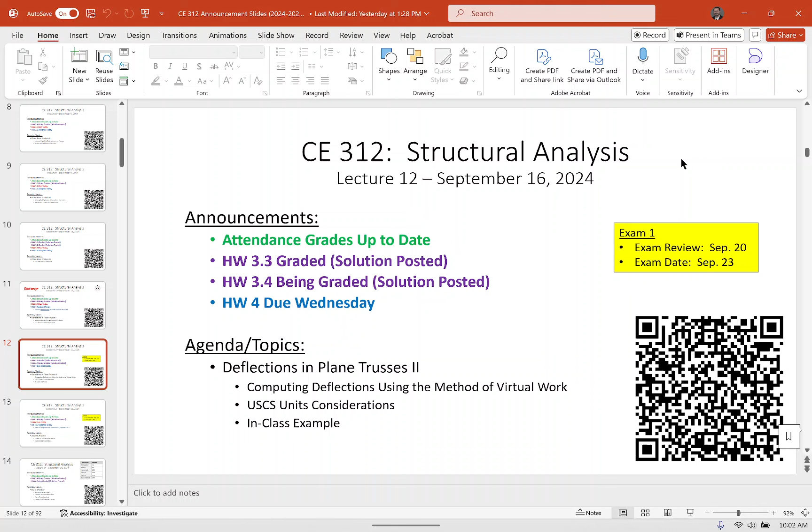So with that, let's get into our discussion today. If you recall, I think I maybe blew your minds a little bit last time with all this energy stuff. The idea is that we're going to be solving for deflections, and the way we'll approach deformation problems in structural mechanics is to use an energy approach. We compare the external work done to the system against the energy it stores, much like Link in Zelda drawing the bow.

Link does external work to the bow by moving the arrow through a given distance, so he applies the force through a given distance. That's the external work done. And then the bow stores energy, because when Link lets go, the arrow shoots, right? So if you compare those two energies and set them equal to one another, you can solve for the deflection. That's basically what we're doing.

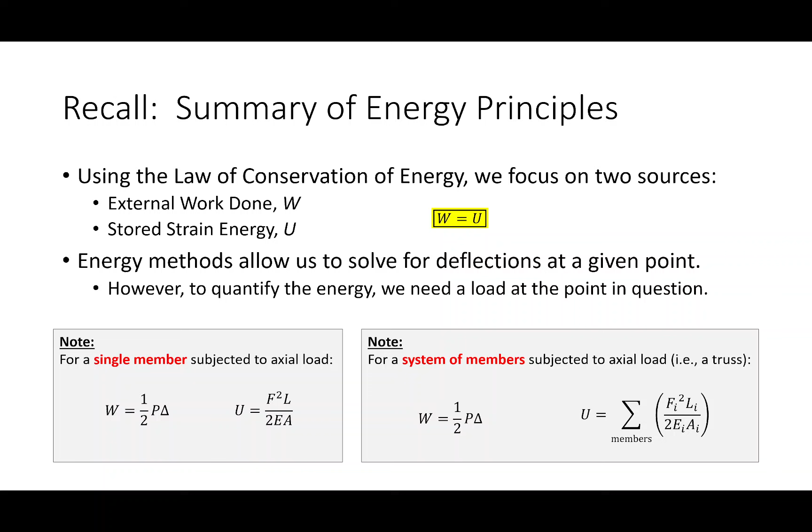Now the problem with a direct energy approach, which is what we had on the last slide and talked about last time, is that it's great if you have a system with a single load on it and you're interested in finding deflection where that load is. But that doesn't really happen a lot in structural engineering. In structural engineering, we have loads all over the place, and we want to find the deflection right there.

So the way we handle that is we preload the structure. We put a fake load where we're interested in finding the deflection, and then we add on top of that all of the other loads. And if you remember, we called that P1 and P2. So P1 is that fake load, P2 is the set of all the real loads.

So when we do that, we separate all our energy components and say, okay, let's only use the ones that really matter. Because if all the external work done equals all the stored strain energy, then each of these components are equal, like W1 equals U1, W2 equals U2, and so on and so forth. So we'll only use W2 and U2 because those are the ones that are most useful.

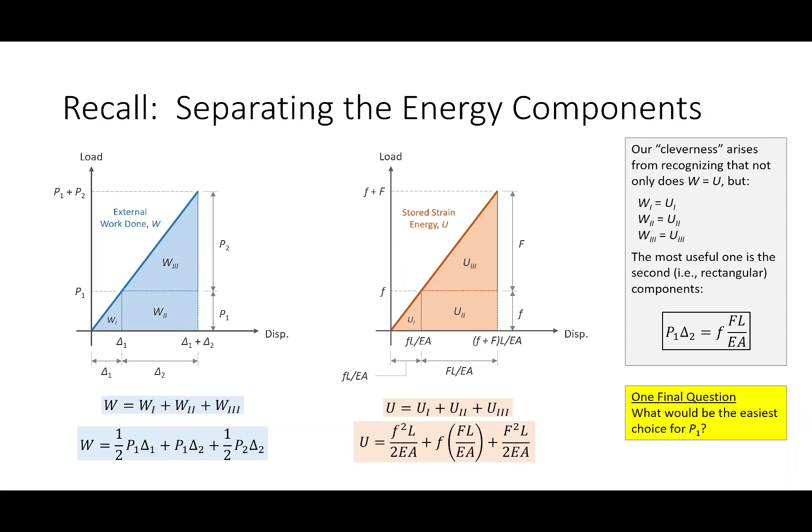So what we get is our fake load times the deflection we're actually interested in equals this. And since this fake load can be whatever we want it to be, because we're using it just as a means of tracking the energy, we'll set it equal to 1. And that's the method of virtual work. So a lot of what you're about to see in the next few slides is just a rehash of what we discussed on Friday.

We're going to put it to practice with a real example here in a bit. So, what do we do with the method of virtual work, or what is the method of virtual work? It's also known as the unit load method. It's an energy-based method for computing deflections.

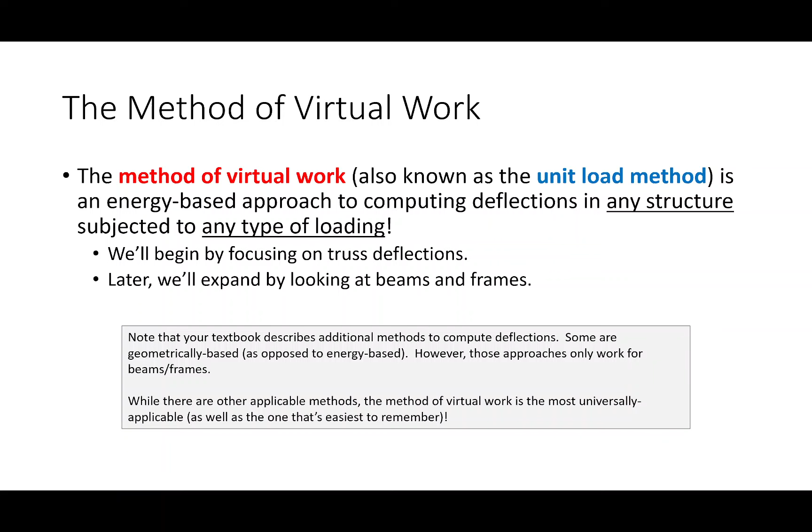We're going to start with truss deflections, but when we start looking at beam deflections and frame deflections, we're going to use the same approach, the same idea, the same unit load method. The mechanics of applying the unit load method to beams and frames is a little different because we've got to break out some integrals, but the idea is the same. The underlying concepts have not changed.

So how does it work? We start off with the illustrative example we talked about on Friday. We said, all right, let's determine the vertical deflection at B. Here's the truss. It's a regular old structural analysis problem like we've seen this whole semester. The only thing that's different is I'm giving you more data than I did before.

I'm giving you the area of each member, in other words, how big around they are, and I'm telling you that each member is made of aluminum. And that's important because I'm giving you the E value for aluminum. So what I have done for this truss is I have defined not only its geometric section properties, but I've defined its constitutive properties as well.

I didn't do that before because for statically determinate structures, it does not matter if the truss is made out of steel or concrete or popsicle sticks. It doesn't really matter. As long as the truss is determinate, the forces in the members and the reactions are independent of what the truss is made out of.

But that's not the case with deflections. Think about it like this: if I made a truss out of steel elements as opposed to making a truss out of rubber bands, it's going to deform differently, right? The deformation is going to be different. That's what we're talking about - deformation. So we have to be more precise in our definitions.

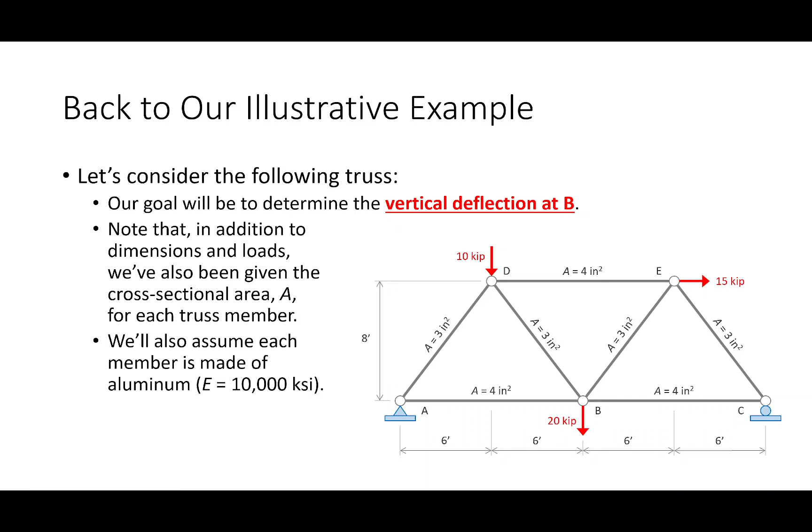So how does it work? The first step is we solve the truss. Now, we've already done this problem a while back, so these numbers that you see here should be familiar - this was a truss that we solved in a prior lecture. I'm going to call these the real forces because these are the actual forces present on the structure, and I'm going to denote real forces with a capital F.

Then what I'm going to do is kick all of those loads off the system, and instead only apply a single load. That single load has a magnitude of 1, because remember, we can choose the magnitude whatever we want, and 1's the easiest number to deal with, because anything times 1 is itself. I'm going to place that load on joint B, because that's the problem - I'm interested in finding the deflection at joint B. I'm placing it vertically because I'm interested in finding vertical deflection at joint B.

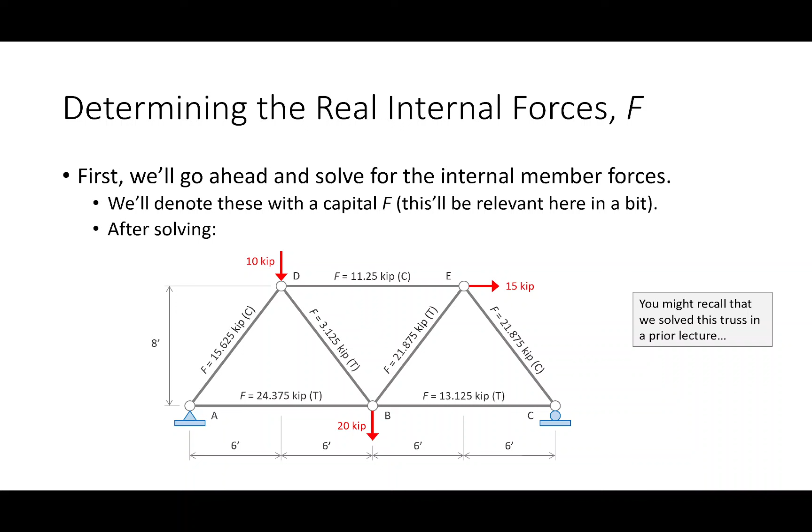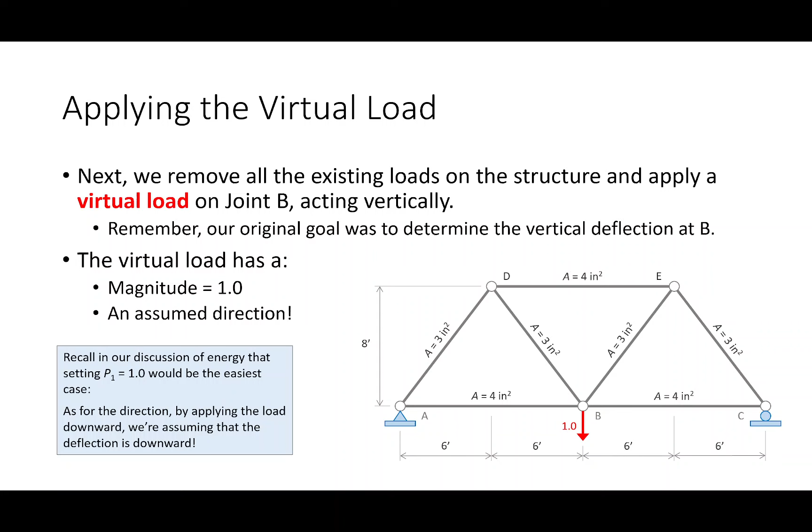Now I'm placing it downward, because if I go back to the original problem and look at the loads on this truss, I kind of think that when it's all said and done, joint B is going to deflect downward. So I'm going to take that fake load, which I'll call a virtual load, and apply it downwards. If I get a negative answer at the end of the day, that just means I'm wrong, and that it's deflecting upwards. Everybody all right with that? Same kind of idea as what we've done before, right? So far so good?

So I solved the truss. Solve the truss again - that's the only part that does kind of suck with deflection problems, is that they are labor intensive. So I'm sure somebody's asking, well, what about an exam? Don't worry, the trusses in this regard will be manageable - trust me, I know what I'm doing there. So we apply the load, solve the truss again, and we get a new set of internal forces in the members, and I'm going to call those little f's.

The little f corresponding to the virtual forces. Now, a couple things about the virtual analysis.

Does anybody notice how the structure is symmetric now? It wasn't symmetric before, but it is now. So this member equals this one, equals that one, this one equals that one. So if you can exploit symmetry, you can make your work a lot easier.

By only solving half the structure. Also, while it isn't true in this problem, it is going to be in our example: if you're removing a bunch of loads and replacing them with just a single load, you might have zero force members. Maybe you didn't in the real structure, but you do in the virtual one. So if you can identify some zero force members, you can make the analysis go real quick, and we're going to see that today with our example. Just something to keep in mind.

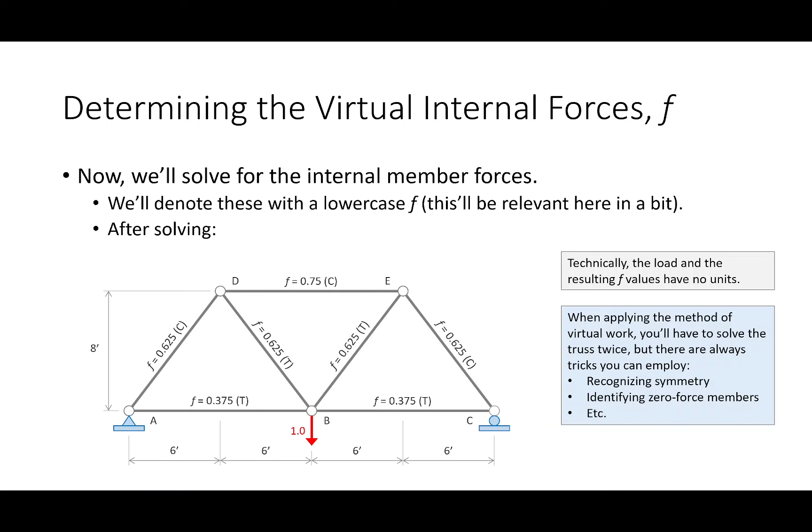So for every member in the truss, you've got a set of real analysis results, which we'll call capital F, and a set of virtual analysis results, which we'll call little f. If we're talking about US units, big F is usually measured in kips, and little f is unitless. When we put that 1 kip load, it's not 1 kip or 1 kilonewton, it's just 1, so it doesn't really have units. Your textbook calls this F and F sub V, but it's the same thing, F for virtual.

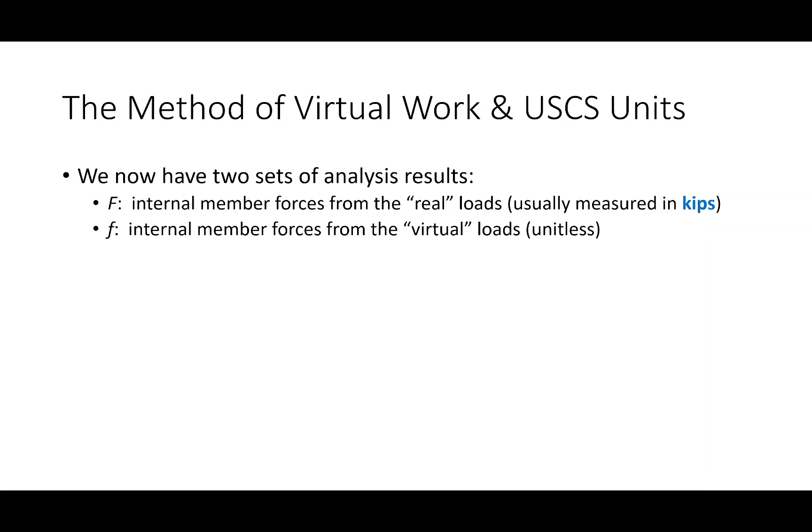So the next thing we have to do is compute little f times big F times L over EA for every member. Set it up in a table: little f, big F, L over EA, row by row for every member.

So by the way, what software package would be very nice for this? Excel. It's a very tabular friendly computation.

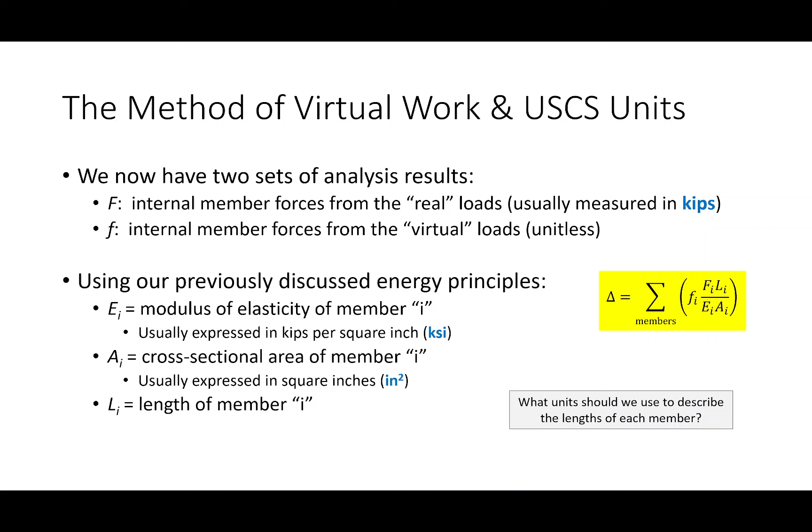Now, the terms that go into this are your E value, which is in KSI, and your area, which is in square inches. So notice, I've got kips, no units, kips per square inch, square inches, and then the length of each member. What units should I use to describe the member length? Inches. If you look at the problem, the truss members are described in feet, but this isn't feet, these are inches. The reason we're using inches is so that the units cancel out. So you could argue there's a conversion factor of 12 we have to apply — we're going to take all of our lengths and multiply them by 12, and we'll do that today as well. I just want you to see that the lengths are in inches, and that's why. Does that make sense?

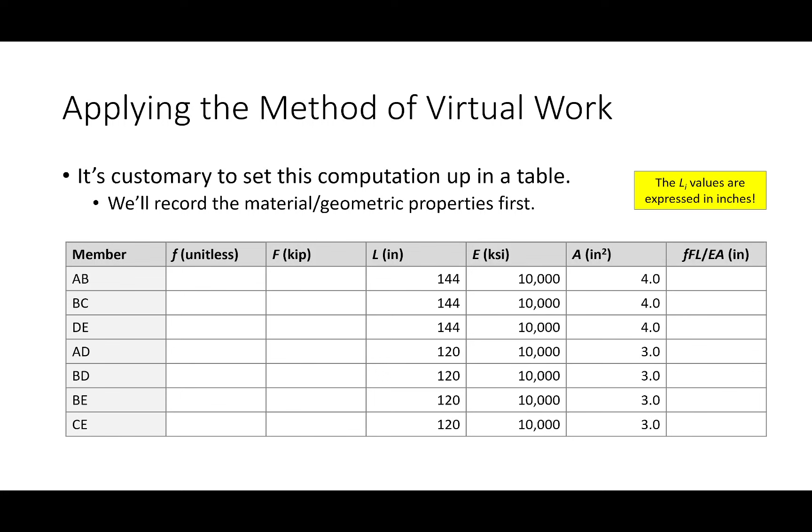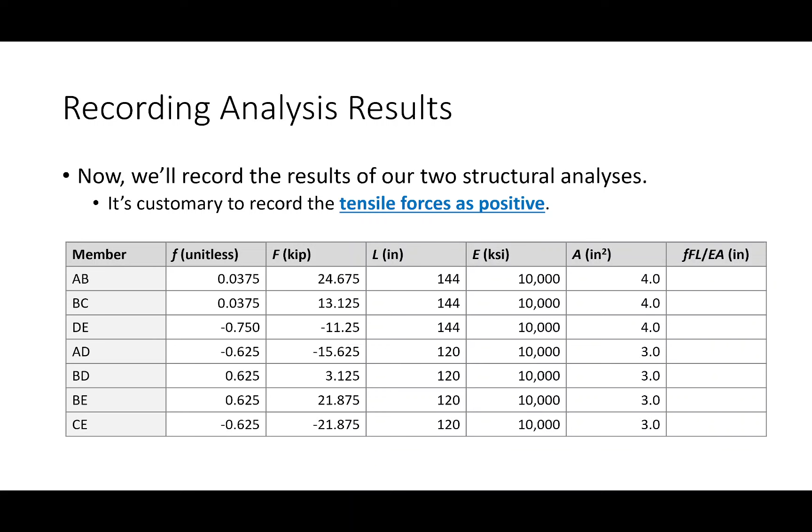So set it up in a table. Here's my L values, here's my E values, here's my A values, corresponding to each truss member. Just be a little bit organized with it. We're going to put the little f values here, big F values here. Typically just put tension as positive as long as you're consistent — you can actually use compression as positive, but customarily we always use tension. So if there's a negative value, that just means that answer's in compression. And then for each row: bam, bam, bam, divided by that, equals this. That times that times that, divided by that, equals this. And so on and so forth.

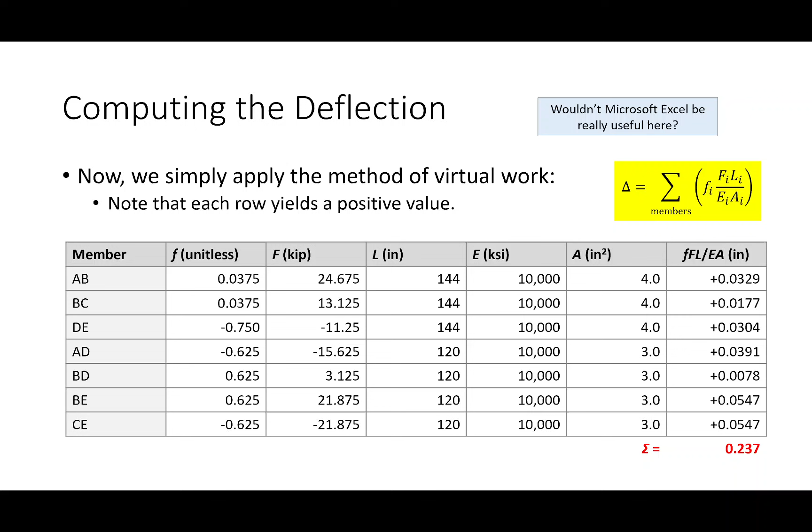And you get some values, sum them up, and that sum is your deflection, point blank. So to summarize, because we got a positive answer, and because we took care of our units, I propose that joint B deflects 0.237 inches, and it deflects downward. And that's how you do it.

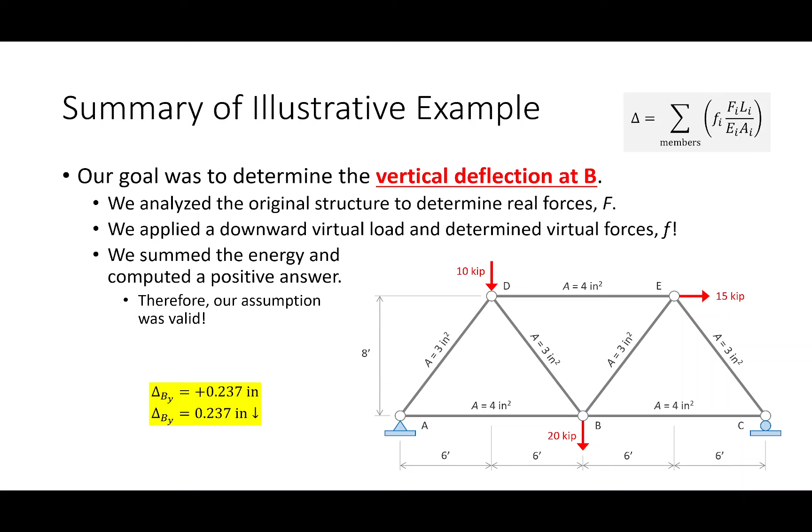So I want to take a step back and just make sure, from a concept standpoint, that the idea makes sense. Is everybody okay with the general idea of what we're doing here? Everybody good? So if that's the case, let's look at our in-class example.

Everybody okay with that? All right. So, here's what we're going to do.

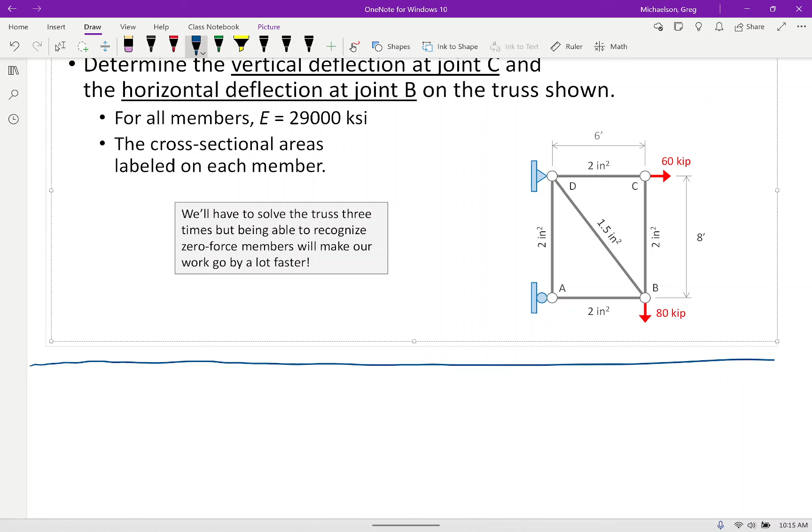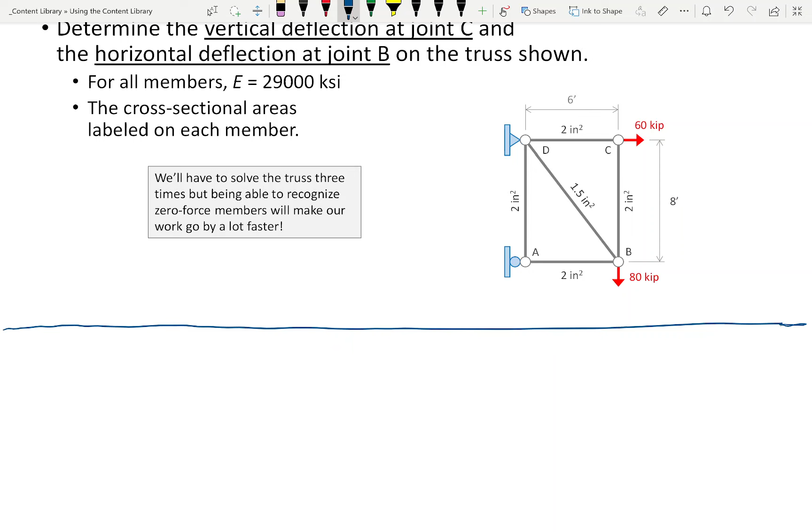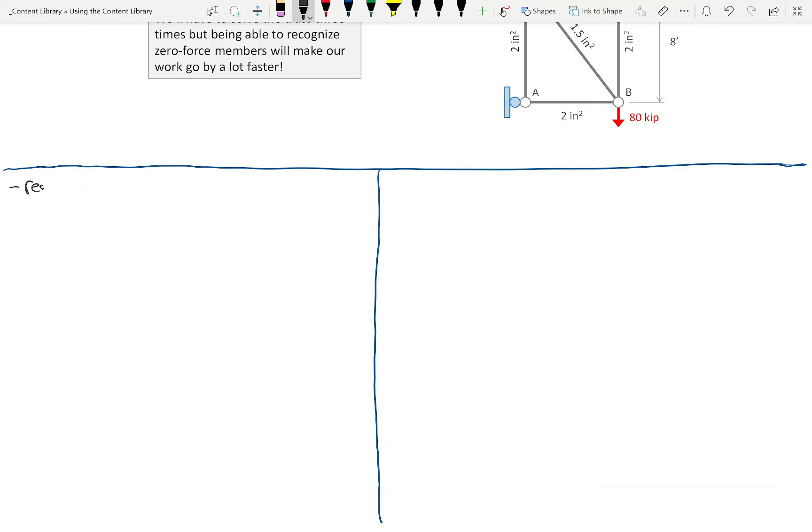All right, so I want to try and keep this organized. So if you don't mind, what I'm going to do is put the real structure over here, and then I'm going to put a virtual analysis over here.

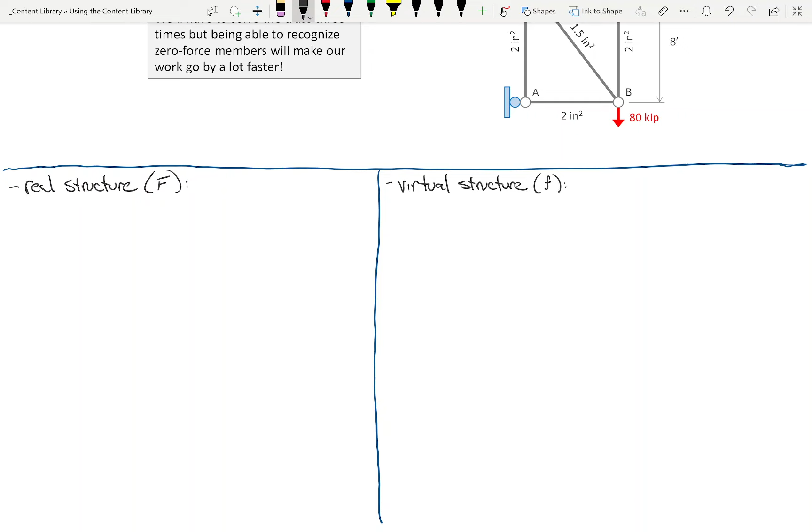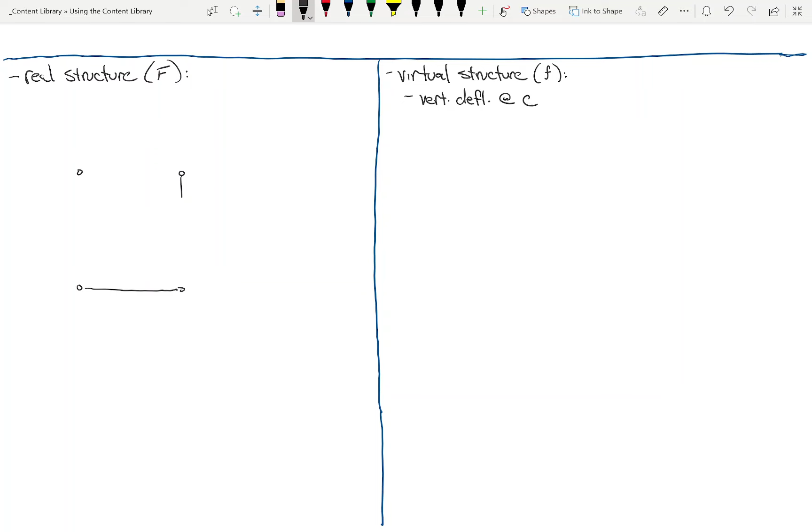And what we'll do is we'll do the vertical deflection first. So we'll do that. I'll try and not write too tiny, but you'll see what I'm doing here. All right, let's see.

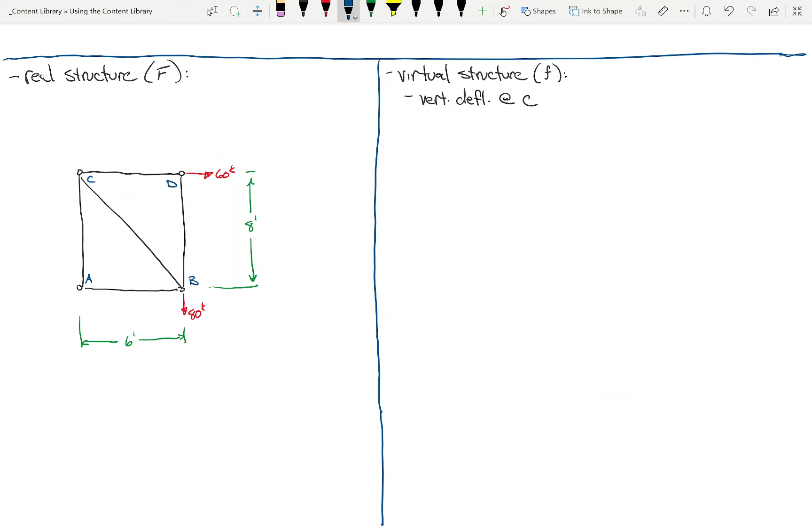This is... okay, all right. Let's see, in terms of boundary conditions, we have a roller here, and we have a hinge right here.

I think you got C and D swapped. I did? Yes. You are 100% right. You are 100% right, okay.

Let's see, is there any zero force members in this truss? Anybody see one? I see one, I actually see two.

AD, you are right. But why'd you say that? Because if you look at joint A, there's only a reaction going left to right. There you go. If there's a force here going horizontally, that's got to be the same. What's going on there? Nothing. So this is a zero force member. By that logic, anybody see any other zero force members?

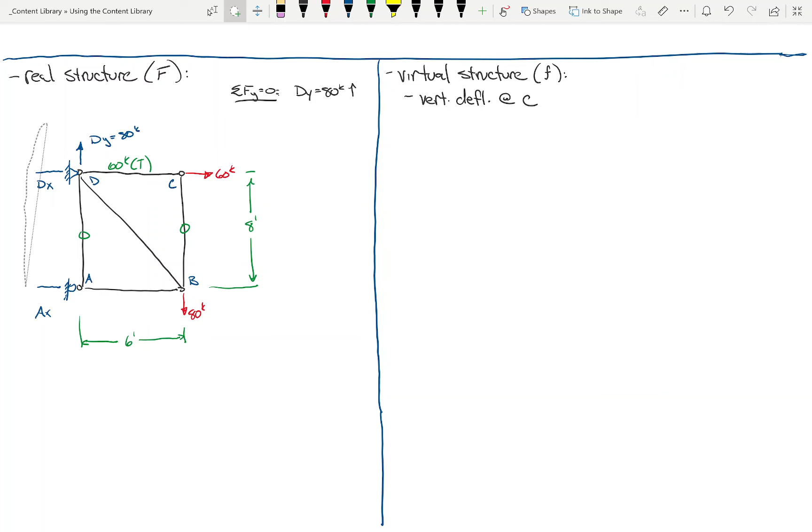Maybe I can do this, maybe I can scooch this over just a bit. I forgot you, you go back there. All right, and I'm going to sum moments at D.

And what am I going to get? Let's see, I don't have to worry about that, don't have to worry about that. I'm going to get 80 kips times 6 feet. Has got to be balanced by AX, right? So if 80 kips is rotating it like this, AX needs to rotate it the other way. So I propose that AX is going in that direction.

So if 80 times 6 equals something times 8, what is that something? 60, right? So therefore...

So if AX equals 60, what's DX? Is it 0? Oh no, it's 120 to the left, because I've got 60 and 60, so that's got to be 120. Did everybody see that?

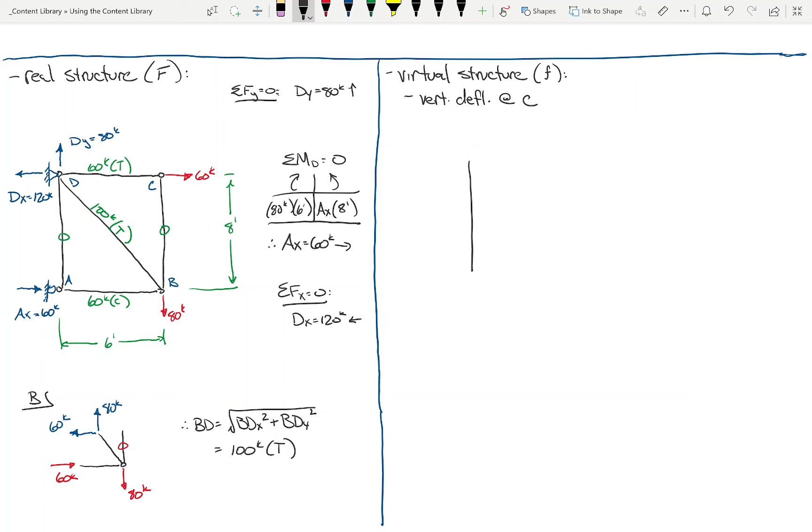All right, now let's do this truss analysis again. So what are we going to do? So we're going to analyze this truss all over again.

But what I'm going to do is, instead of analyzing the truss for the loads that were originally present, I'm going to kick all of those loads off and I'm going to place a single load on the truss. That load is going to have a magnitude of 1. It is going to be vertical and I'm going to place it at C.

Why is it a vertical load at C? Because I'm interested in the vertical deflection at C. So I'm going to have just a single load of 1.0. Now, my question is, would you like me to place that load upwards or downwards? Downwards. Okay.

So now we are going to analyze this truss all over again. And then likewise, we're going to have a reaction here and a reaction here. I'm going to assume those in the same direction that I have over here. So we'll call this AX and DX.

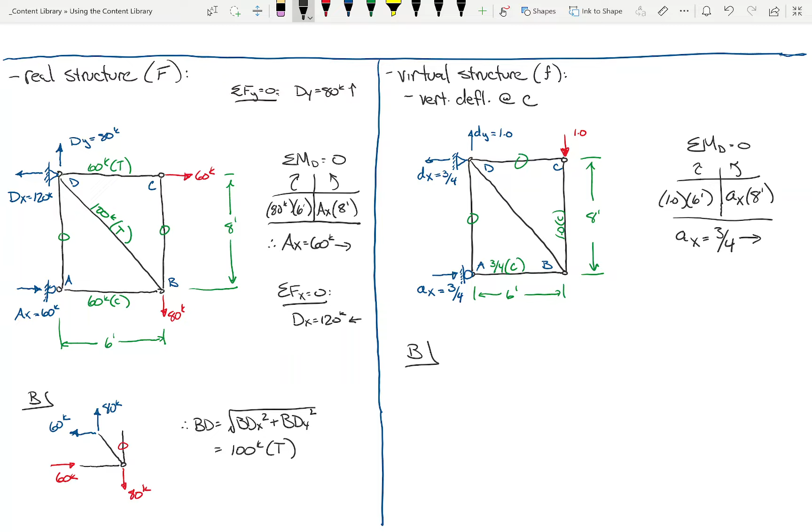So, are there any external loads on joint B? No. There were over here, now there's not. We have a 1 going like that, and a 3/4 going like that. So what do we have? A vertical and a horizontal.

So the vertical is 1, that's 3/4. So they're both in the right direction - they both comport with the slope ratio. So what is BD going to be now? Five fourths, right? And that's in tension, right?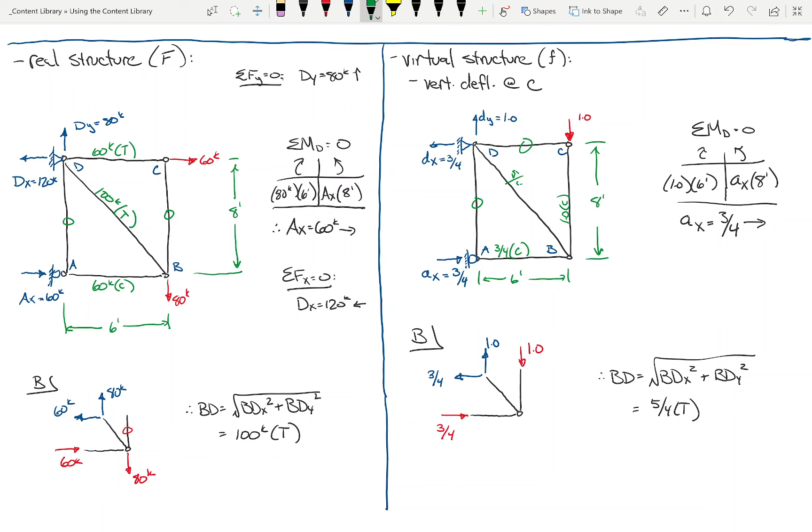I knew I threw a bunch of stuff at you and we did this really fast, but hopefully the truss analysis, while it was a little fast, was manageable. Does anybody have any questions about what we did? Everybody good so far? Okay.

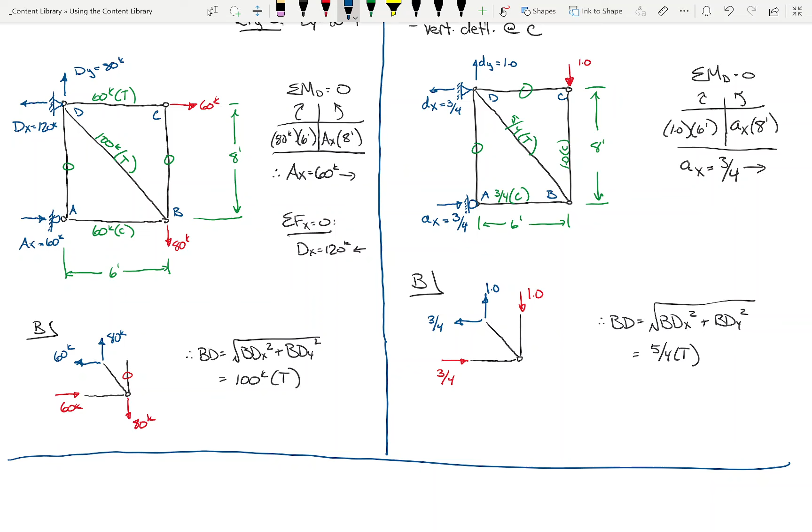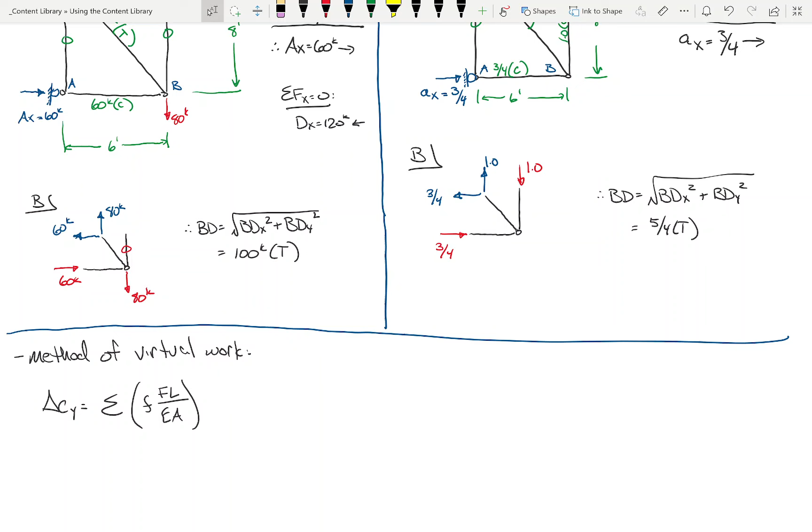Does everybody have this here on the board? Okay, so now what we can do is we can apply the method of virtual work. And what does the method of virtual work say we've got to do? That if we want to determine the vertical deflection at C, we sum up the following: little f times big F times L over EA for every member, okay? Now, as I said, this is a calculation that loves to use what software package? So let's do that.

It's almost like I was ready for this. By the way, what unit should I put length in? Inches.

So this is going to be my table that I set up. The 5 members that I have in the truss are - I've got the horizontal members, I've got the vertical members, and I have my diagonal. Okay? All right.

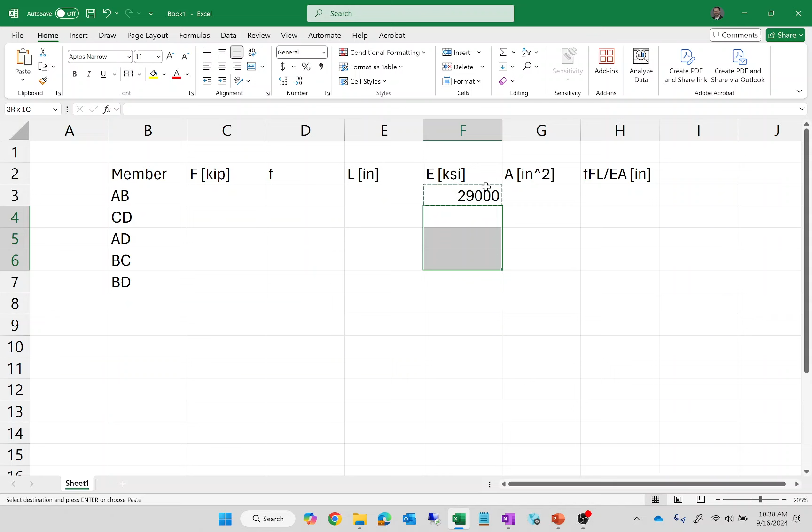Let's do the easy values. What was the E value for every member? 29,000. Okay, what about the areas? They were all 2 except for the diagonal, right? The diagonal was 1.5.

All right, what about the member length? What are the lengths of the horizontal members? So 72 inches. What about the verticals? 96 inches. And what about the diagonals? So if you want, you could do it like this: 12 times square root - just do the Pythagorean theorem, multiply it by 12, get 120. Okay, so far so good?

Okay, so let's start off with the real forces. Somebody help me with that. What was member AB? 60 kips, in compression. So, negative 60, okay. CD: 60 kips - positive 60. What about AD? 0. What about BC? 0. What about BD? 100 kips in tension, so positive.

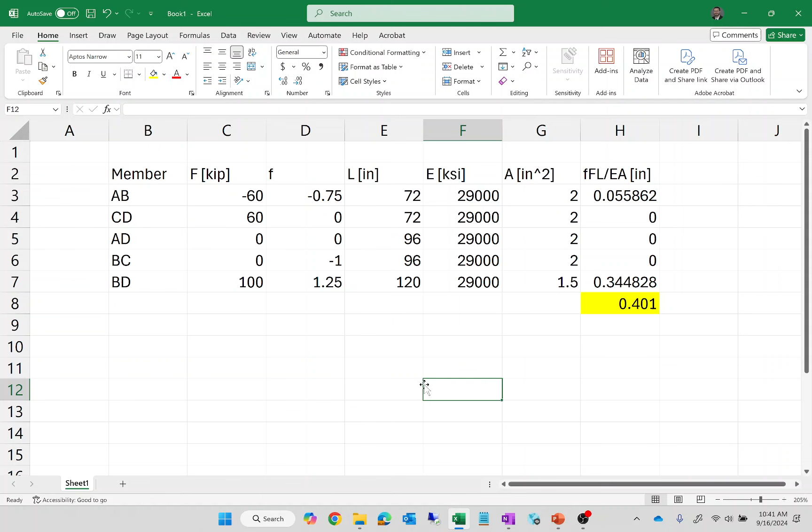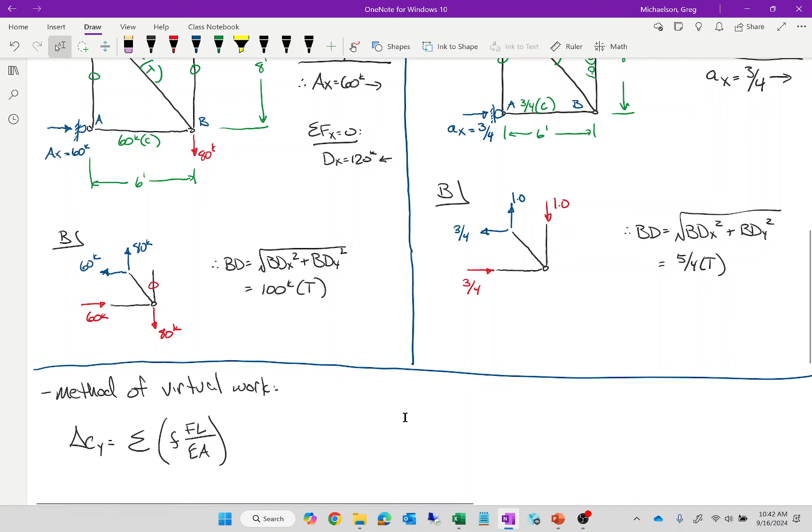Pretty simple, right? So what do we do? For each row: little f times big F times L, divided by E, divided by A. So you can do that, or you can put it in parentheses and get the same answer. Then just copy that down. A lot of them are 0 because either the real or the virtual force is 0. And then sum it up. What I like to do is not go more than 3 decimal places. So what we'll do is put that in there just so we have it for posterity.

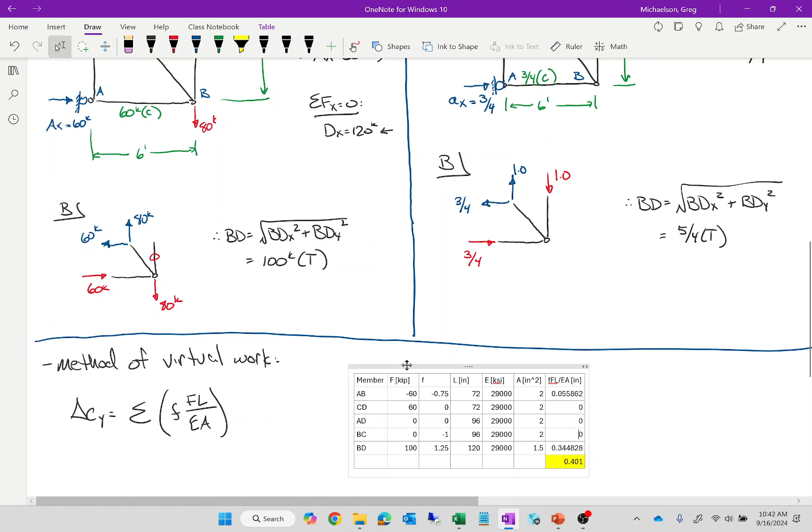That right there, and we get... what are the units, by the way? Inches. And which way? Down. Because we assumed downward displacement, and that's what we actually got.

And we're going to do the horizontal one here in a second. It's a lot easier than you would think. All right, any questions?

Okay, first off, this is for the vertical deflection. What's going to change for the horizontal deflection in this table of values? The little f, right? So in Excel, let's just delete those, and when we solve the virtual truss again, we'll just put those values in right here. Does that sound good?

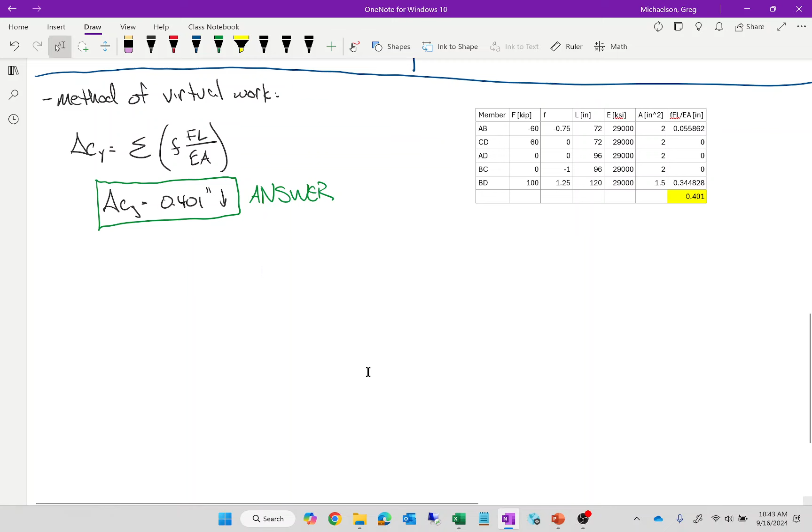Okay, now what was the goal for the horizontal one? Find the horizontal deflection at B. At B, okay. All right, I'm going to take this keyboard off again.

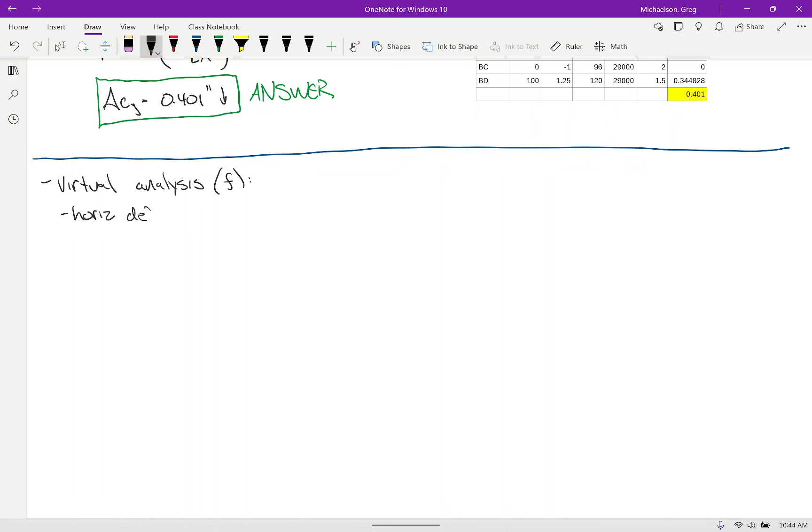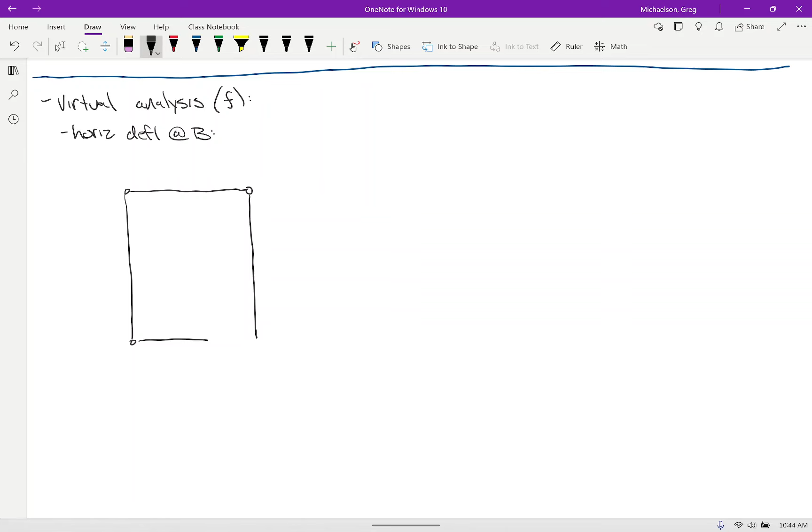Okay, so here's what I'm going to do.

I am going to assume that the truss will deflect in such a way that joint B will deflect to the right. So I'm going to put a horizontal load of 1.0 right here. I'm going to give you a spoiler alert: that's wrong, that's actually not correct. It actually deflects the other way, but let's see what happens, since we've got a class coming in here in a little bit.

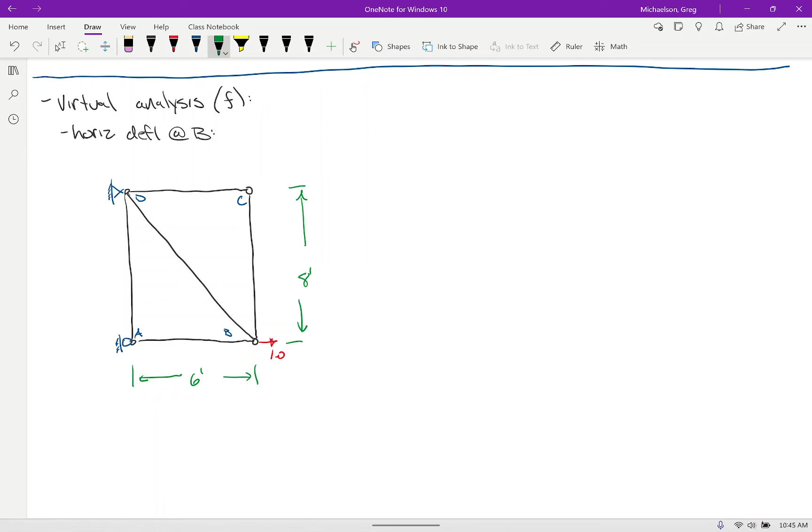I'm going to walk you through a couple things. Somebody tell me what's going on with these two members. Zero, right? This is zero. That's zero. Okay, now watch this. Would you agree that that's zero? So if I do, let's see, okay, well let's hold off on that.

If I sum moments at A, this is going through A, that's going through A, I propose that this is zero as well. In fact, the only reaction in this entire truss is that, okay?

If I look at joint C, I have no forces going through joint C. That's zero. These two members are framing through joint C, and there's no other loads, so these two are zero. And in fact, the only force in the entire truss is that one right there. That's the only force. Everything else is zero.

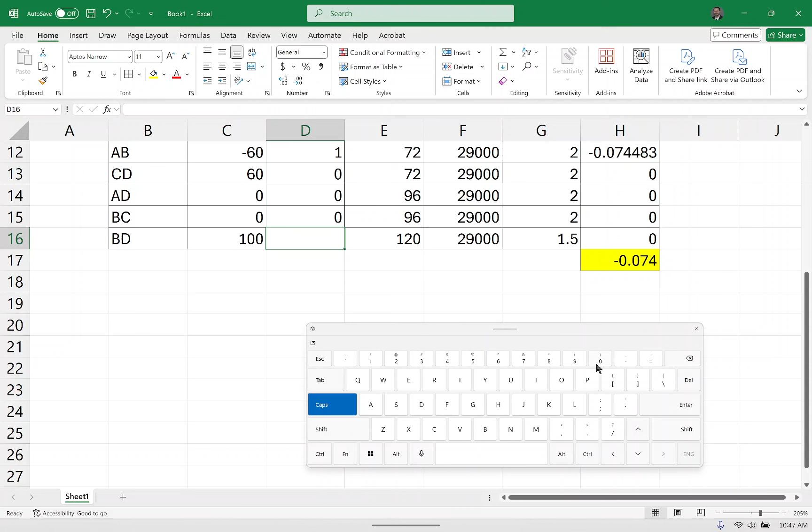So if I go to Excel and I say, let's make this 1, and make this 0, there's my deflection. Notice how this comes out as negative? It comes out as negative because my assumption was wrong.

I assumed right, got a negative answer. It's going to the left. That's all that means.

Let me take a step back and see how we're feeling on this. I know I did that truss kind of quick, but there's not a lot going on with it. Anybody have any questions? Yes.

On the exam, when we do this analysis, are we doing it by hand or Excel? Yes, you're doing it by hand. But I'll talk about this on the exam review. I'll most likely give you a table so that you don't have to draw all that out. I'll try and make that stuff easy for you.